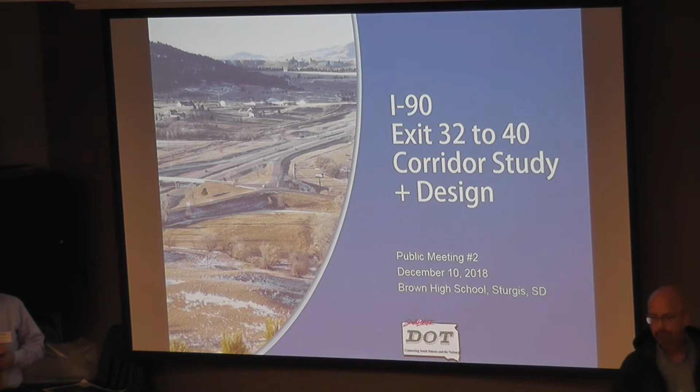Thank you, everybody, for showing up. If you're here to hear about the I-90 exit 32 to 40 corridor study and design project, you're in the right place. If not, you're welcome to leave, it won't hurt my feelings. But we're going to talk about this project.

This is our second public meeting. We held one almost exactly a year ago, December 20th, right here in the same location, where we were in much more preliminary stages. We were just talking about the project and trying to understand and identify all the issues and problems within the corridor.

Tonight you're going to see that we've done some work. As we go through our agenda, we'll take care of a little bit of housekeeping. I'll re-review what the project needs and the project goals are. So why is there a project? What do we want to accomplish?

We'll look at concept development. A number of concepts, just ideas of what could be done in the corridor to address the issues and deficiencies, were developed. Some of them were dismissed. Some are going to be studied in more detail.

We'll talk about environmental concerns, because one of our responsibilities is not only to look at costs and construction and everything else, but also to consider the environmental impacts in that corridor. We'll look at the alternative evaluation, how we plan to make a decision on the final preferred alternative, and then next steps in how you can stay involved in the project.

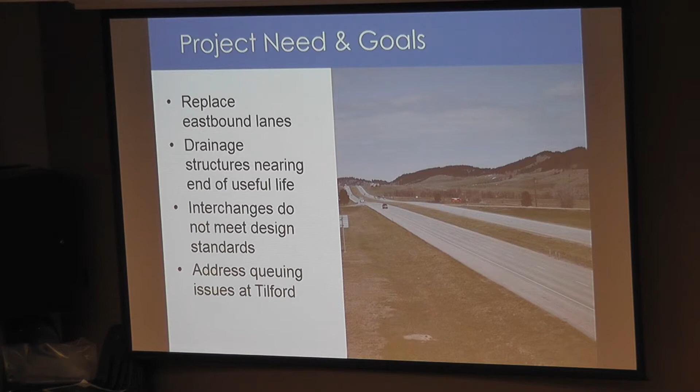Interchanges don't meet design standards. Once upon a time they did meet design standards when they were first built, but those standards have changed, and as they stand today they do not meet the current design standards. Then finally, there are some queuing issues at Tilford with the weigh-in-motion, and trucks pulling off to get away, sometimes those queues back up onto the interstate. That's a huge safety concern, so we wanted to make sure we're addressing that as well.

So what are the goals? Those are some of the needs we'd identified very early on. What are the goals for the project?

The first is to identify and analyze conceptual improvements. That includes finding all of those issues in the corridor, finding all those deficiencies in the corridor, and bringing them to the study advisory team, which is made up of the DOT, Meade County, and Federal Highway Administration, saying here's what we found, how do we want to address these problems?

The second is then to identify and develop feasible construction projects within the corridor. We identify all the problems, the issues, the deficiencies. How do we put them together to make logical construction projects to minimize costs, to minimize impacts to the traveling public? And then finally, put together those final design plans so construction can eventually happen.

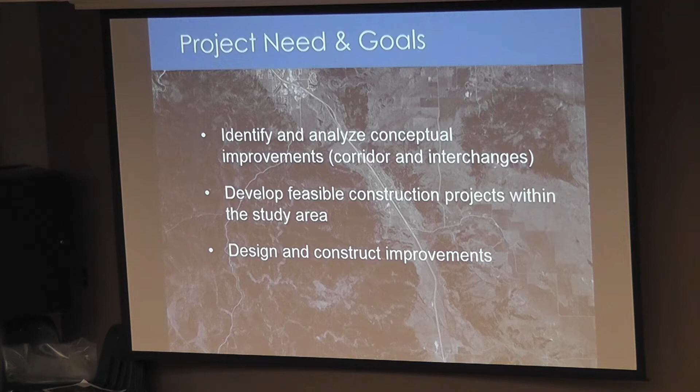I mentioned that we're going to look at some concepts in a little bit, but I will tell you first how those concepts were developed.

After we were hired and brought on, we were told and tasked to identify the issues and deficiencies in the corridor. That includes a wide range of studies, everything from snow drifting issues to bridge structural issues to replacing the pavement. We did that.

We developed a list of well over 24 known issues within the corridor. In May of 2018, we brought it to the study advisory team and said, here's what we found: animal crashes, snow drifting, substandard vertical clearances, substandard curves, all of these things.

We had a conversation with the study advisory team over a 2-day workshop that said, here's what we think are important, here are the things that really need to be addressed. And we started talking about how we could put these things together.

Using the direction they gave us out of that workshop, we went back to our offices and spent about 4 months developing a wide range of concepts. And we'll see those here very shortly.

Some of those concepts, or all of them, were brought back to the study advisory team in late September of this year. We talked about the concepts, what was a good idea, what maybe wasn't such a good idea, and you'll see some of those concepts post that workshop have been dismissed, largely because they're either too costly or they have too much environmental impact.

A westbound button hook configuration is off the table for the same reasons as the other ones. A partial folded diamond, same thing - you see how far up the hill that moves, the impacts would have simply been too great. The last one we dismissed at exit 34 was called a trumpet interchange, and that one was dismissed due to operational issues. So those are no longer under consideration.

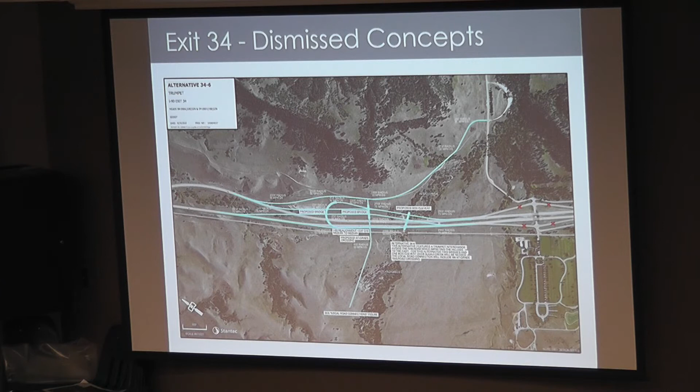What is under consideration? We have three concepts we're going to be doing more analysis on moving ahead. The first one is between the Black Hills National Cemetery, which you'll see on the bottom right-hand side of the screen, and Sturgis.

The second one, again in about the same location, is the modified folded diamond. The study advisory team took a look at this and said this one seems reasonable at face value, so let's look at this one in more detail as well.

The third one jumps to the other side of the Black Hills National Cemetery, up near Blucksberg, putting an interchange between the cemetery and a lot of the RV parks and residential houses. This one has a roundabout on the northeast side of the interstate, which allows us to keep things more compressed and keep from migrating too far into that hillside and creating bigger issues. So those three concepts for exit 34 are what we're proposing to study in more detail moving ahead.

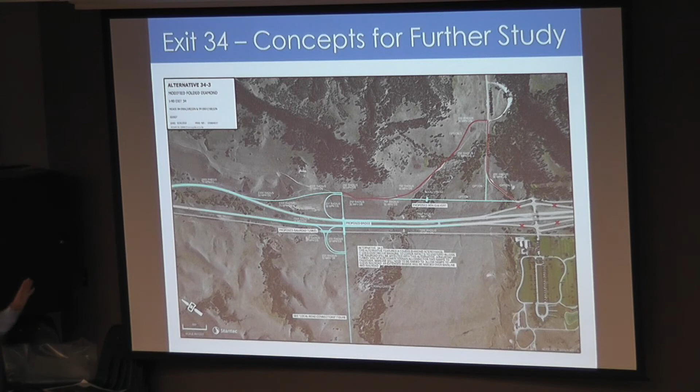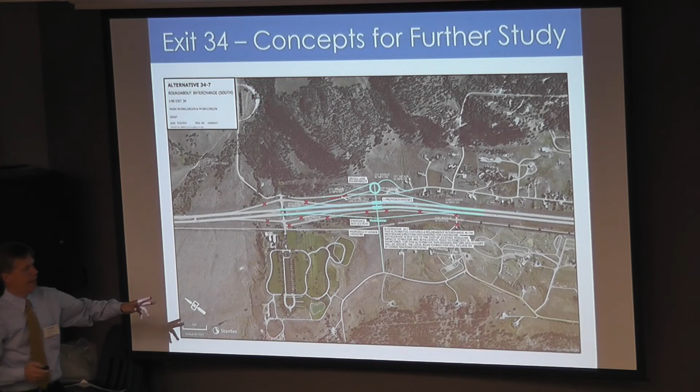Now, if you look at the first two options I showed you, between the cemetery and Sturgis, you see this line coming down and just stopping. That road eventually has to provide access to everybody who lives and works over here. So we developed some local road options that would connect that interchange with those businesses and residences further south.

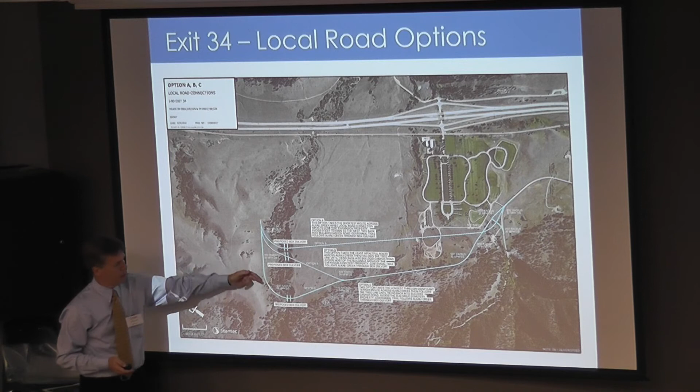Three options have been identified. One just hits the property that's going to be acquired by the Black Hills National Cemetery, so there are some impacts there. The second one moves us a little further away, and the third one really moves us far away, where we actually start having some potential impacts to the Black Hills National Forest.

At exit 37, we also have three concepts proposed for further study. The first one rebuilds the existing interchange very much like it is today. You see the ramps get pushed out, which helps us meet those design standards, but the skew on the bridge and everything else stays largely the same.

The second concept bends the road on the west side of the interstate to allow us to put a bridge across the interstate perpendicular to the travel lanes. That allows us a couple different things: it helps us keep traffic moving while the new bridge is being constructed, and it minimizes the length of that bridge to help reduce costs. So that option will be considered in more detail.

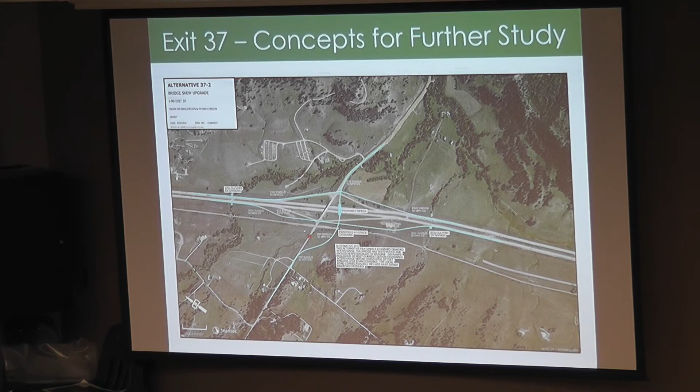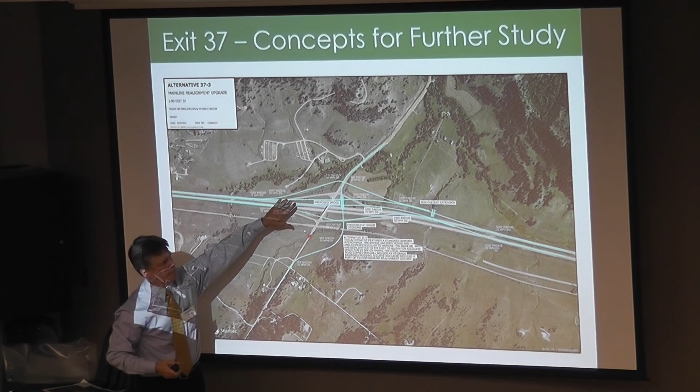The third one kind of plays off that. It does that same loop to give us a bridge that is perpendicular to the main line, but it also realigns some of the main lines. So that is the third option at exit 37 that will be considered.

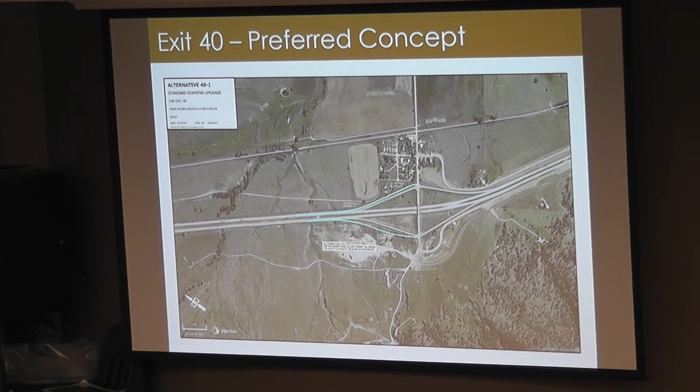At exit 40, there's really not much going on, but to meet design standards, we're going to rebuild the two ramps on the Sturgis side of the interchange, simply to get those design standards met for safety reasons.

With that, I'm going to turn it over to Teresa, who is leading the environmental studies, and she'll give you a highlight of the environmental concerns in the corridor.

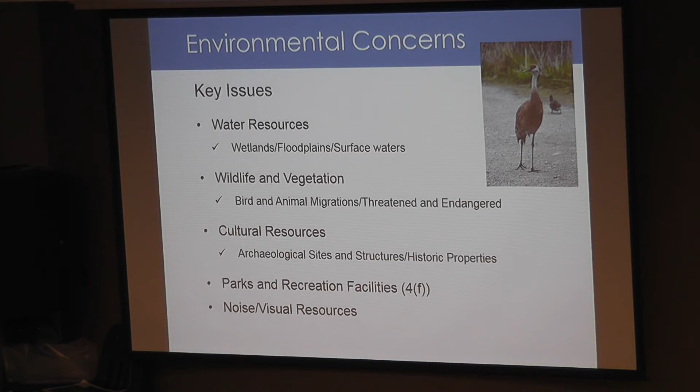As part of the corridor study, we looked at the environmental resources and tried to document and learn about those. The ones that stood out were first the water resources—wetlands along the corridor, floodplains, and surface waters, mostly streams. We looked at animal and bird migrations; there are elk herds that cross the corridor. Threatened and endangered species are always something to consider if you're impacting their habitat. Cultural resources—certain parts of the corridor have several archaeological sites that have been documented or recommended. Parks and recreational facilities—anytime you're impacting public lands with a transportation project with a federal element, there can be additional coordination needed. And noise and visual, because of the land use along the corridor, we have campgrounds, a cemetery, areas that might be sensitive to increases in noise.

Some of the studies we did included a wetland delineation. We started with a desktop delineation—looked at maps, aerials, and other delineations that were done—and tried to map what we thought was out there. Then we had a crew go out and field delineate the corridor. You'll see that in just a minute.

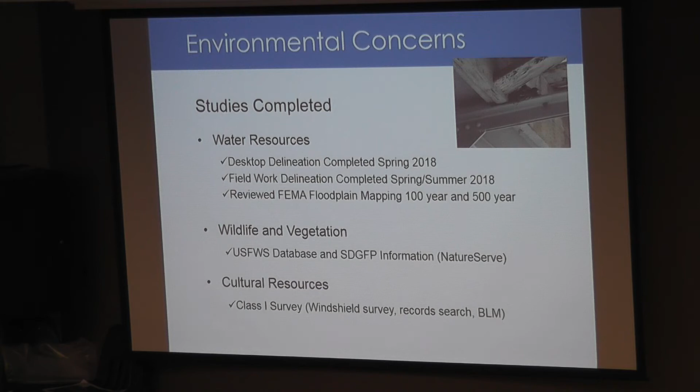We also looked at the FEMA floodplain maps to see if we were within any floodplains or floodways along the corridor. We also looked at the U.S. Fish and Wildlife Service and the South Dakota Game, Fish and Parks databases to gather more information on threatened and endangered wildlife. And lastly, we did a Class 1 survey for cultural resources—a windshield survey, a record search through SHPO, and the BLM provided us with a lot of good data. That's all been wrapped up into a Class 1 survey report, which we've used to define some areas of avoidance.

As Dale mentioned, we looked at the whole corridor, exits 32 to 40, but now we're going to focus on 34 and 37 to 40 as projects that are moving forward.

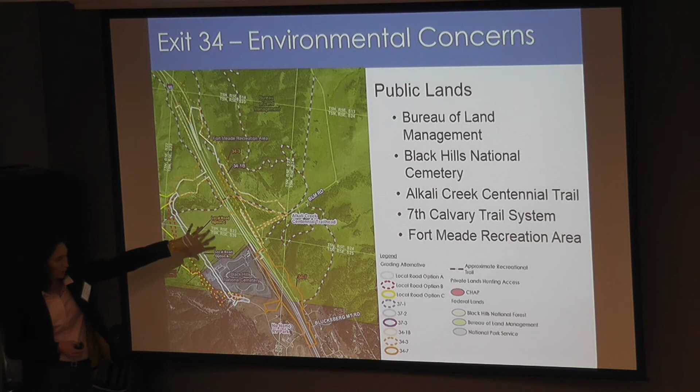Public lands along the corridor include—all of this green area is Bureau of Land Management land, used for recreational purposes. This is the Black Hills National Cemetery; they're also annexing land from the BLM, so they will be expanding. Those are 2 federal properties we'll have to be aware of. There's also U.S. federal forest land right on the east-west side of the Black Hills National Cemetery. And this is Centennial Trail, a state trail, so we'll be cognizant of anything that affects it—both of the 2 northern alternatives are likely to have an effect on that trail. There are also state and local trails that connect to Centennial Trail that we need to be aware of.

As we shift south, we get out of those areas a little bit. We do nip the bottom of the Bureau of Land Management property, but that tends to be better because you're not right in the heart of it—your impacts are kind of shifted to one side, so that may be more beneficial.

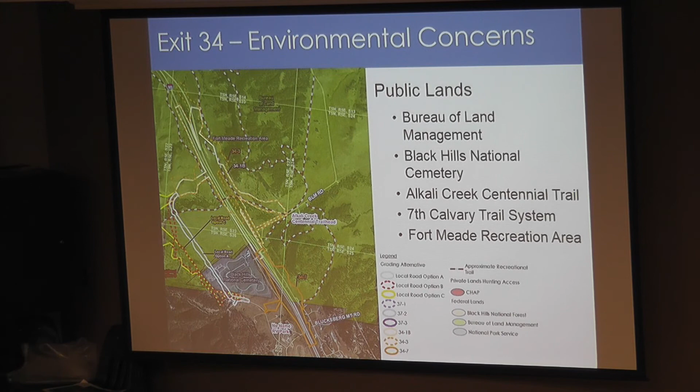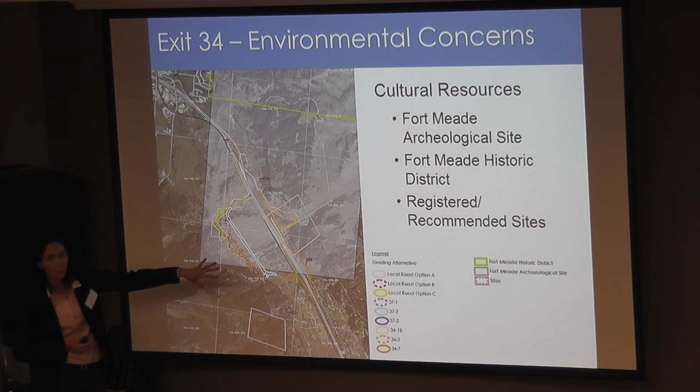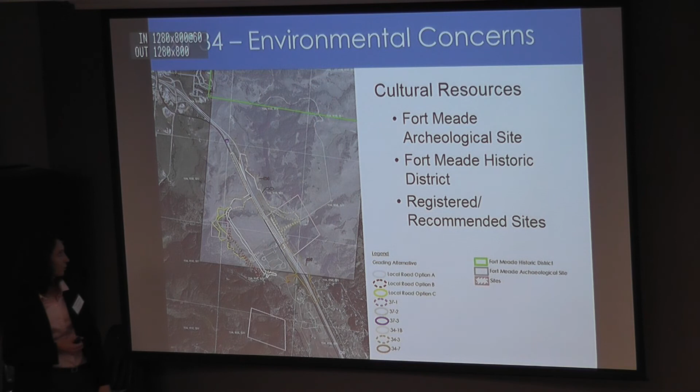Again, you can see that the two options to the north are well within that avoidance area. As Dale said, we also have to consider impacts from local connecting roads if we're looking at those northern alternatives, because they require that road. If you do the alternative that shifts to the south, you no longer need that road, so we have to add those impacts together.

So at exit 37, we have far fewer impacts because we're moving away from the resources, and the footprint is closer to what it is now. We're not expanding as much into a new area as we were at 34.

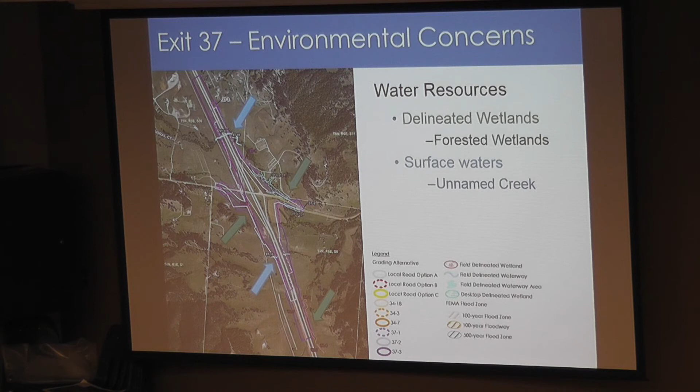We have two stream crossings, and both are affected by all three alternatives, so there's really no difference there. The wetlands are different though. We have three wetland complexes: two vegetated smaller wetland complexes and one large forested wetland complex.

The alternative 37-2 is the one that skews the bridge. That's actually our most favorable option regarding wetlands, because it shifts the bridge so the ramps can stay closer, tighter to where they are now. That pulls us out of that wetland.

37-3 is the one that actually moves the main line, and that's the most impactful. We end up hitting the vegetated wetlands, and then we hit the forested wetlands as well.

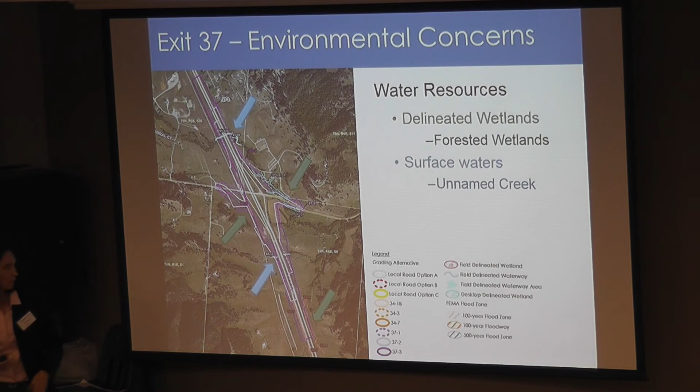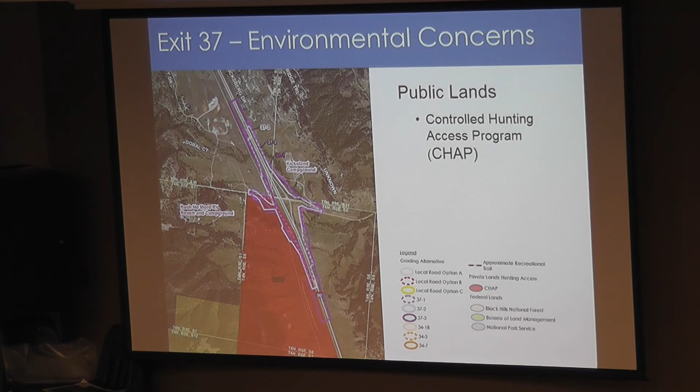Public lands—we have very few as we shift down to exit 37. We have CHAP lands, which are actually privately owned, so there's just some extra coordination needed with the landowners there. For cultural resources, this is our avoidance area, which you can see is well outside of any of our limits.

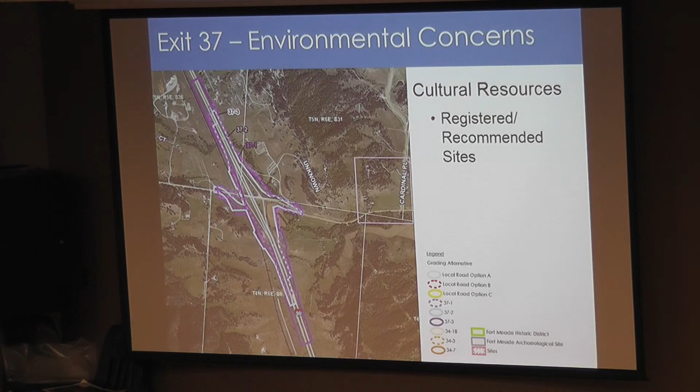So I'll leave it to Dale to explain how that all fits into the bigger picture.

Thanks, Teresa. As you're getting more information, you're seeing that developing transportation projects really ends up being a balancing act—costs, impacts, safety, environmental issues. We have to find the alternative that best balances all of those, and to accomplish that we've got to identify some criteria that we're going to judge these concepts against.

We've done that. If you picked up a comment form and information at the desk where you signed in, you'll see the issues we're planning to use to address which of these concepts are the preferred alternatives. We've also prioritized them, from the ones we thought were most important to the ones that are still important but just not as important.

So in order of priority, we're saying safety is the number one concern of these projects. Then geometric needs, environmental impacts, costs, traffic and levels of service—how well it operates. Constructability issues, impacts to access for current and future development, right-of-way impacts, flexibility with future development, bicycle enhancements, and utility impacts are the criteria we've identified from most important to least important.

One of the reasons I'm thrilled that so many people came out tonight is we want to get your opinions. Are those the right criteria? Are they in the right order? Is there something we didn't think of, or something you think we shouldn't even be bothered with? One of the reasons I'm glad you're here tonight is to let us know what you think about those criteria and the system we're going to use to evaluate the concepts here this year.

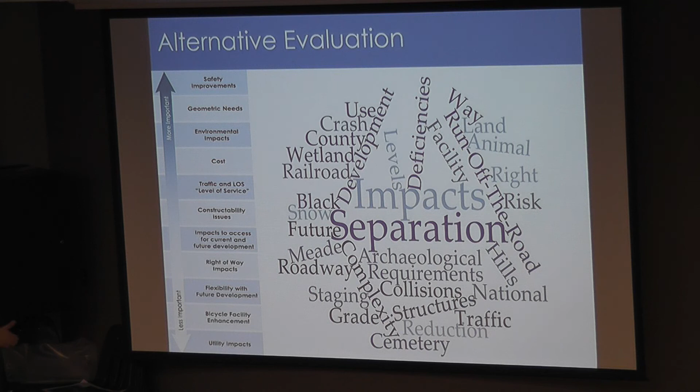So very soon we're wrapping that up. In spring, we'll identify the construction projects, some of the details of those projects and what they will contain. That doesn't mean we're going to have anything we know we're going to build for sure yet, but we do know that we're going to replace exit 37—we just don't know which option we'll use.

We'll submit interchange modification justification reports. Those IMJRs need to be approved by the Federal Highway Administration since the interstate is their system. We're looking at those being done in summer of '19. Then the environmental studies that Teresa will be doing—we're hoping to have the first one completed in fall of '19, which will ultimately allow us to choose what is going to get built.

Now with that, what are the next steps? What's going to happen after tonight? The corridor study we've been doing, identifying issues and developing concepts, is scheduled to enable us to have a preferred alternate and go into preparation of the final design plans, so we can have those done in the fall of 2021.

At this point, the study advisory team has recommended that any construction from exit 37 to exit 40 be the first project that moves ahead, done in 2022. Then the work between exit 37 and exit 32, Sturgis, would be the second project to come through the corridor, probably starting in 2024. That's our target.

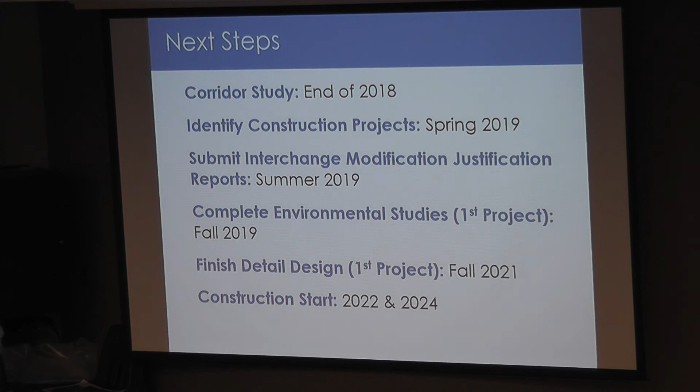So again, we're thrilled that you're here. What we want you to tell us is, in addition to those criteria I identified, what's your favorite option? Why is it your favorite option? What do you not like? Tell us why you don't like it. Do you have comments? Do you have concerns? Do you have ideas, something maybe we haven't thought about? We want to hear all of those things.

Your comments are valuable to us, and I can tell you they will be seriously considered, because part of the process we have to go through with environmental documents is to identify the comments we've received and show that we've addressed them.

Tonight, if you have comments, you can give them to us in a written format. There's plenty of forms on that desk. You can give us an oral comment if you'd like. If you'd rather sit down someplace and just talk, we'll take that as well.

Once you leave, that doesn't mean it's the end of your chance to provide comments. After tonight, you can still provide written comments. Take those with you, write down your comment, fold it up, put a stamp on it, send it. It comes to me, and it gets just as much weight as any comment I get tonight.

You can go to our website and provide comments, www.I-90exit32to40.com. That gives you project information and an opportunity to submit comments. Then finally, if you have our contact information, call us, email us, send us a letter, anything. We want to hear your comments.